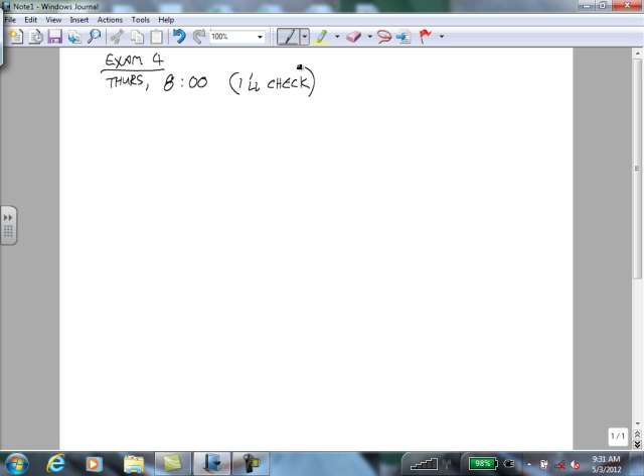This exam is going to have only one topic. The problems are going to be relatively simple because we won't have had much time to work on this stuff, but it's going to be on the energy method for solving linkages. We're going to finish talking about that today, and then the exam is going to be in a week.

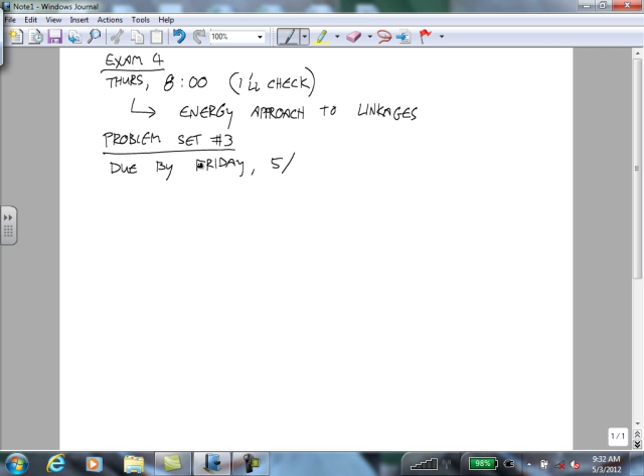There's also a third problem set that's posted right now, and that's due by Friday, 5/11 - is that the 11th? Friday is the, oh yeah, right.

And that has some linkage stuff and some rotating coordinate system stuff. We haven't done any problems that have combined those two topics, but other than that, there's nothing unusual about it, nothing tricky or anything.

Where do we turn it in? Oh yeah, so you can turn in a hard copy if you have it done by, say, Thursday, you can turn it in at the exam. Otherwise, there's a D2L Dropbox for it.

No, it's a linkage using the Newton's laws approach, and then you also have to do a rotating coordinate system kinematics thing with it. So it's bringing those two concepts together. There's no energy stuff on it.

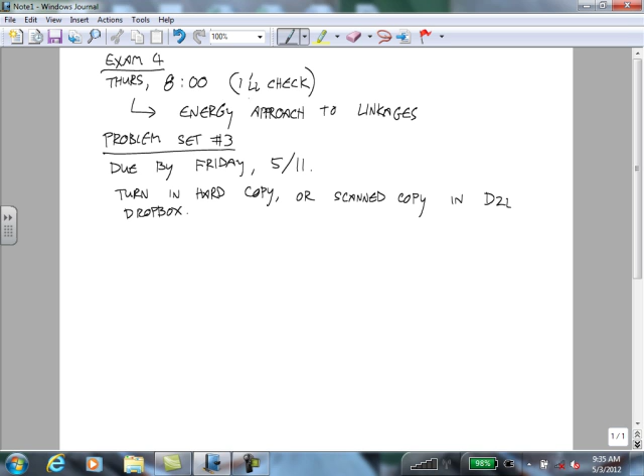No, right, that's right. By the way, this is my last - you guys are going to be the last time I ever give a test in a finals period that doesn't have a cumulative part on it, so.

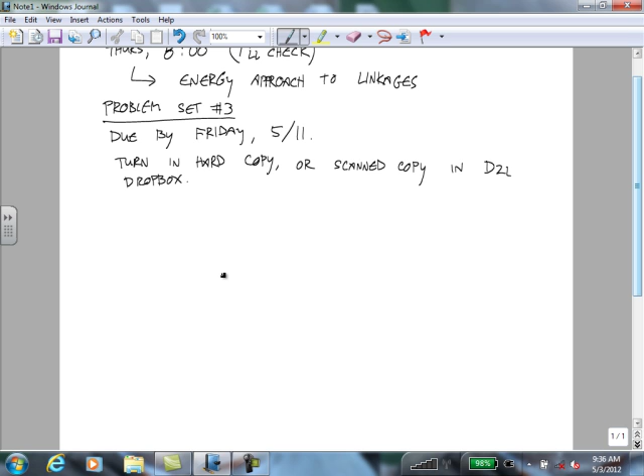That's right, it's all, yeah, so I think what I'm going to do in the future is have a portion that's cumulative and then a portion that's on... You know, I get 3 hours, why waste it?

All right, anyone have any questions about the stuff we're working on now?

Okay, so we're talking about an energy approach to linkages. Energy approaches are kind of cool because you can figure out all this information that has directions using an equation that has no direction associated with it. Seems odd, surprising kind of, but the fact that you don't have to do vector stuff is one of the strengths of energy methods.

Okay, and this energy approach uses the work energy principle, which says add up all the work on the linkage or the connection of things, and that gives you the change in total kinetic energy of the linkage. This actually is true for more than linkages, but it's most useful for linkages and sets of rigid bodies.

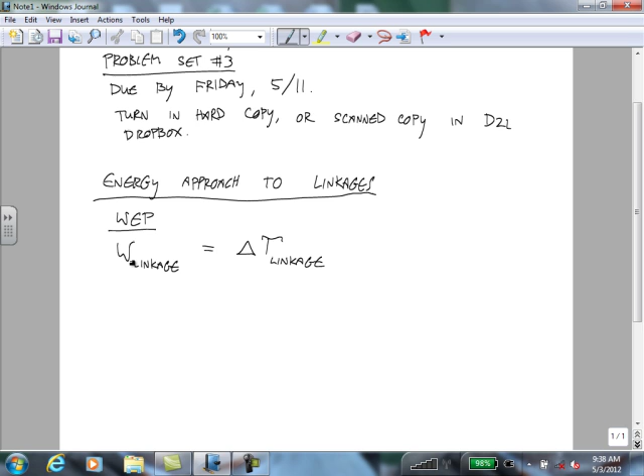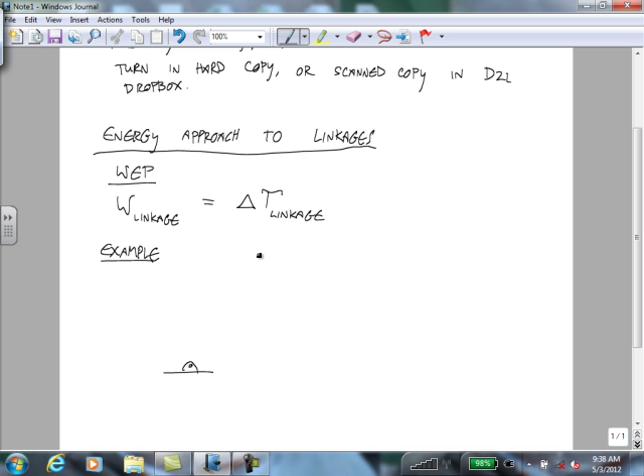So we're going to finish talking about kinetic energy. We're just doing one problem. We've talked about all you need to know for that. And then we'll go into how to calculate work. Once you have those two things, you know how to do these problems. The trick to these problems, though, is always coming up with the geometric constraints. So I'll mention some good places to look for, and some good places to start trying to find these geometric constraints.

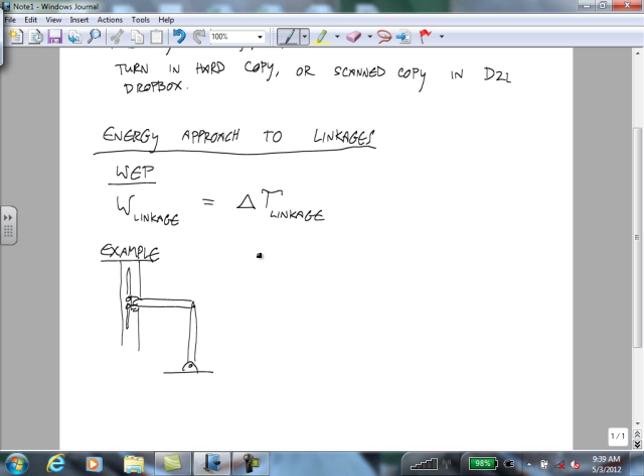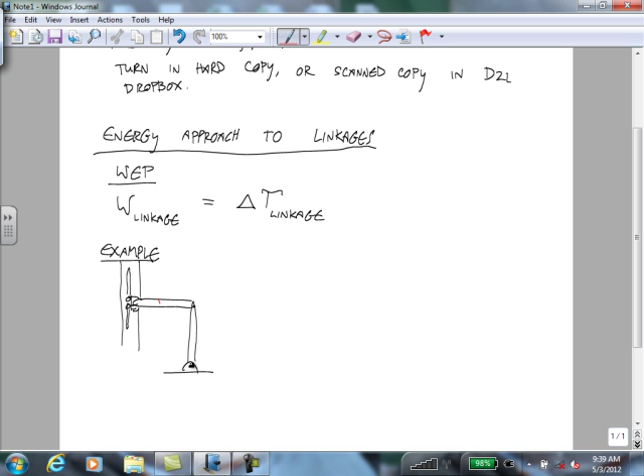Okay, so the example that I presented at the end of last time that we didn't solve was a linkage with a pin joint down here, and a pin joint connects it to a horizontal member. I did it as rollers on a wall, but really let's think of it as confined. You know, rollers on the wall could fall away from the wall. I want to make it clear that this thing is going to stay sliding along that vertical line.

Okay, and so we're going to call this member 1, this member 2. I'll call this joint A, B, and C. And we'll assume that the angular velocity, omega 1, is 5 radians per second. The mass of 1 and the mass of 2 are both the same, 10 kilograms.

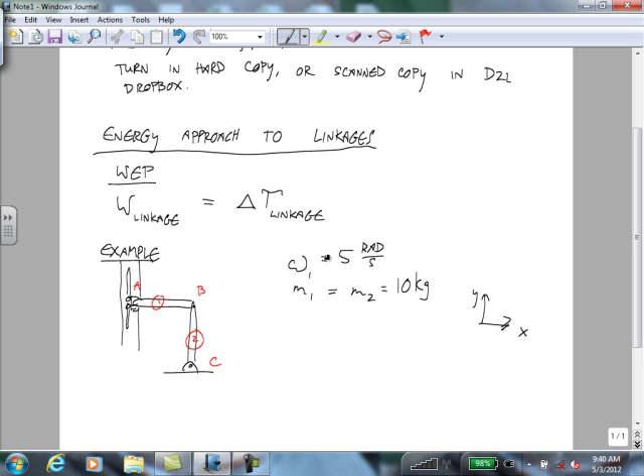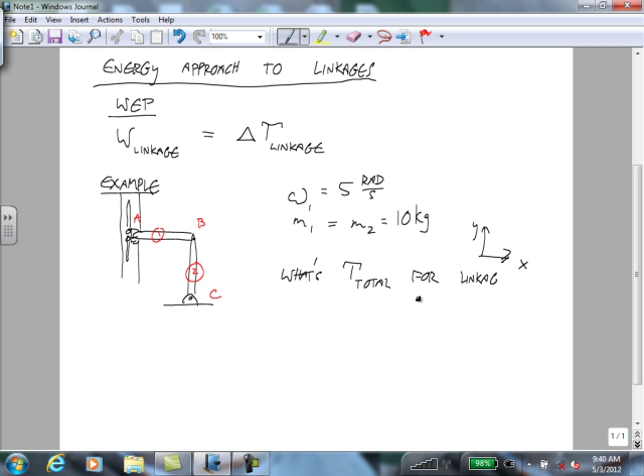And we're going to think about this. There's no coordinate system implied with energy methods, but in order to calculate the work and kinetic energies and stuff, you usually have to just choose a coordinate system, even though the numbers would come out exactly the same no matter what coordinate system you choose. So that's the one I'm going to use, standard coordinate system. And we want to know what's the total kinetic energy for the linkage.

So I'm going to first define the kinetic energy just using the rules that I said for kinetic energy, but I'm going to define as many variables as I need. I'm not going to worry about how many variables I have. Then afterwards, I'm going to think about going back and coming up with constraints between those variables. Okay, like for example...

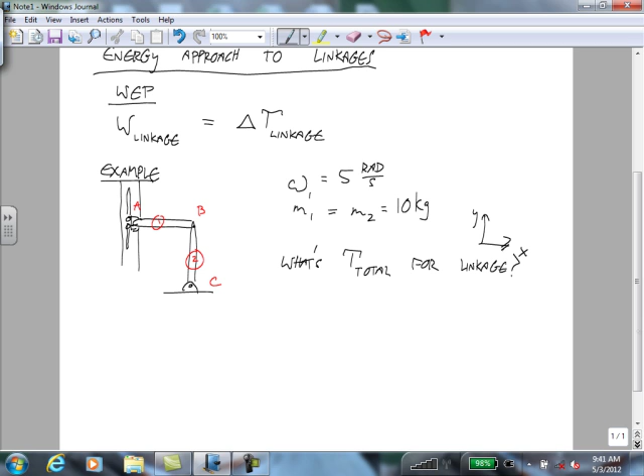The kinetic energy of member 1 here, that doesn't have a fixed point, so we have to use a translational kinetic energy plus a rotational kinetic energy. Obviously, the rotational and the translational kinetic energy are related in some way, right? But I'm not going to worry about that at first. I'm going to come back to that and deal with it with a constraint equation. So first, calculate the kinetic energy of body 1. There's no fixed point.

So the kinetic energy is equal to 1/2 times the moment of inertia about the center of mass times omega 1 squared, plus 1/2 times the mass of the object times the velocity at the center of mass squared. I guess both of these are centers of mass, just to be clear, I'll put the 1 on there.

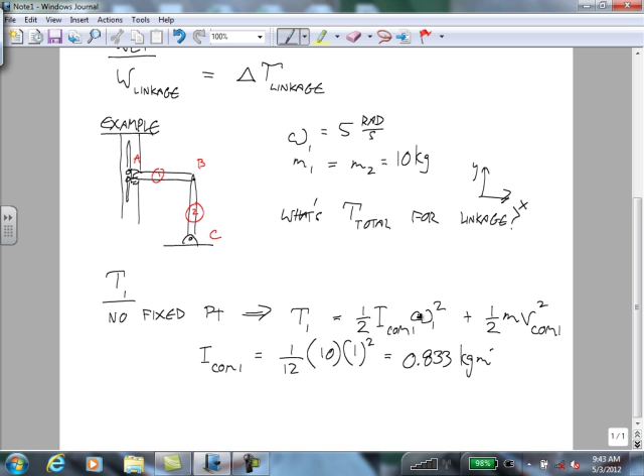Okay, and some of these things we can put numbers to, some we can't yet. The moment of inertia of 1 about the center of mass, we'll call this a slender rod, so this is 1/12 times the mass times the length squared. And so you get 0.833 kilogram meters squared. Both of these lengths are 1 meter.

Okay, so the kinetic energy of body 1 is 0.833 times 1/2 times omega 1, which we know is 5 radians per second, so times 5 squared. That's the rotational kinetic energy. The translational kinetic energy is 5 VCOM1 squared, and the mass is 10, so I already did that. So we have 10.4167. What are the units? So joules, right? This is work, so SI units are joules. So 5 VCOM1 squared.

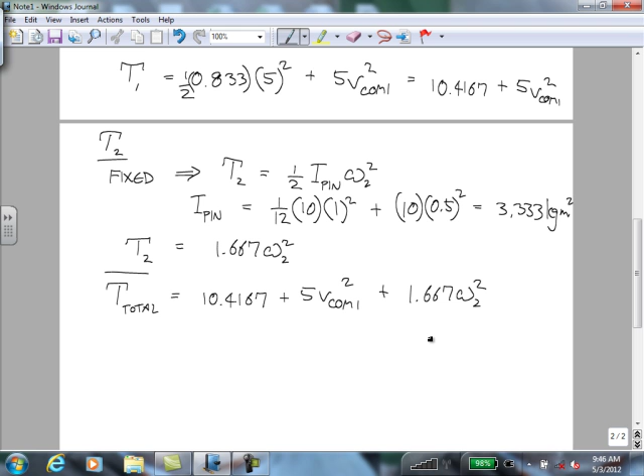So the total kinetic energy is equal to 10.4167. You're just adding up all the kinetic energies of the individual members, plus 5 VCOM1 squared, plus 1.667 omega 2 squared. Okay, but if you look at this object, any one angular velocity determines all the velocities and angular velocities.

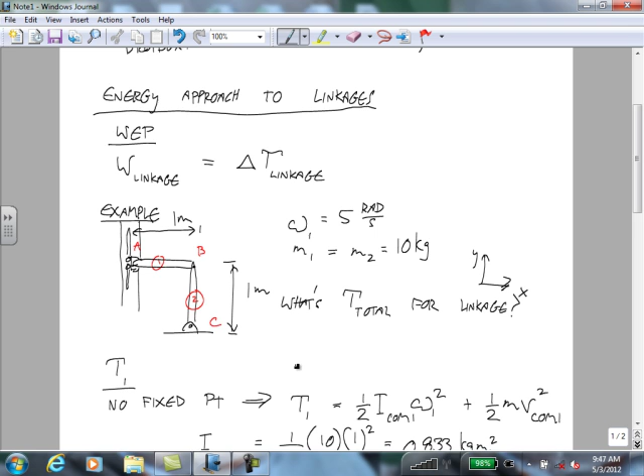Do you see that? If this thing, like if you move this thing, you move member 2, there's only one thing member 1 can do, and vice versa. Okay? This system is totally constrained, which means we shouldn't have to have any variables in our expression for kinetic energy.

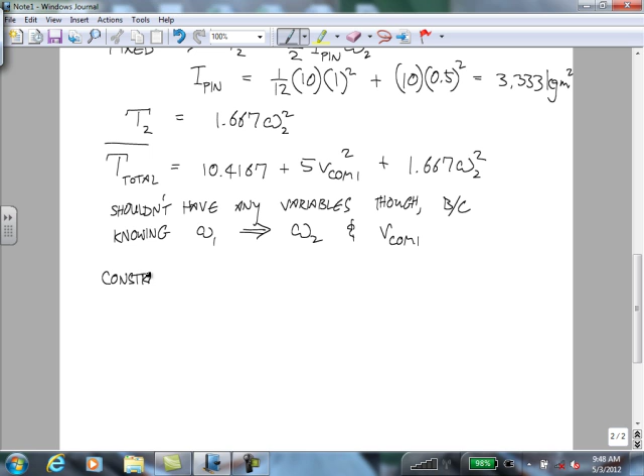So now we're going to look for those constraint equations. Okay, so let me write this. You shouldn't have any variables, though, because knowing omega 1 means that you should know omega 2 and VCOM 1.

So how are we going to do this? So for our constraints, we're going to do it the same way that we did it for the linkage problem set, and the same way we did constraints for any of those linkages. We're going to use the relative motion equations. And we're going to use them with, so actually, that position 1 is the position relative motion equation.

Let me write this in a more organized way. So the relative motion equations that we're going to use are going to be: the position of A is equal to the position of B plus the position of A relative to B. Okay? You can think of that as this is relative to the origin, this is relative to the origin. And the velocity relative motion equation says the velocity of some point A in our coordinate system is equal to the velocity of some point B relative to our coordinate system plus the velocity of A relative to B. Okay?

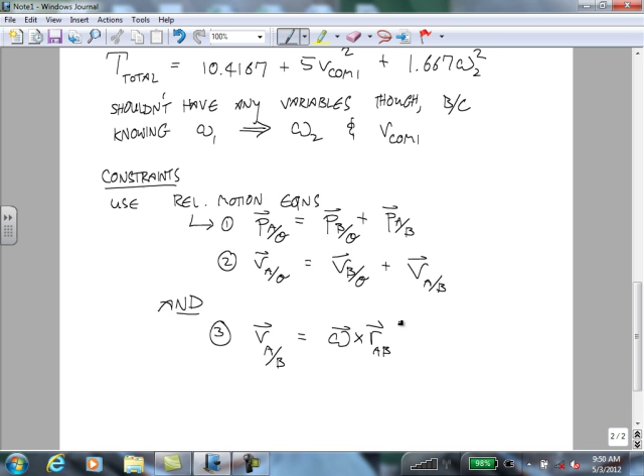And we're going to use that with the velocity of some point A relative to B, okay, is equal to omega of the body crossed with an r vector going to A from B, and that's all. Okay, so those are the same ones that we used for linkages with Newton's laws.

Okay, so what I'm going to do is I'm going to start at the pin. Yep. Yes, that's right. So you can start with either direction. I'm going to start with C because we know the velocity there is 0. Use that to calculate the velocity of B, and then use that and the known angular velocity of member 1 to calculate the velocity of the center of mass.

Yep. So those A's and B's you have are just like... Those are arbitrary, yeah. Oh, I see. I see why you asked that. Yeah, these... In this case, yeah. And what we want is the velocity of the center of mass of 1. So we're going to find the velocity of B relative to the origin, and then we're going to add it to the velocity of the center of mass of 1, given that we know the velocity of B.

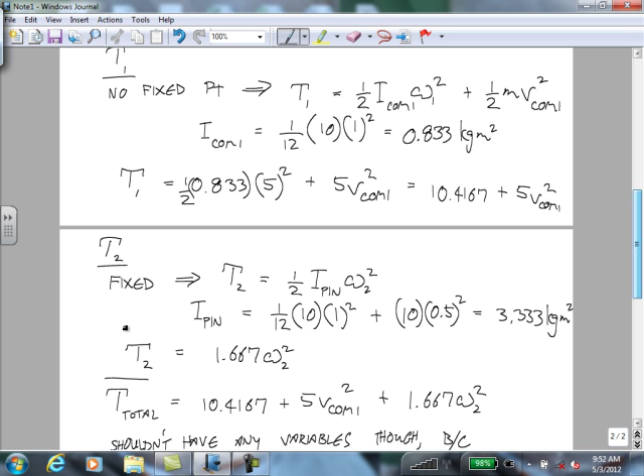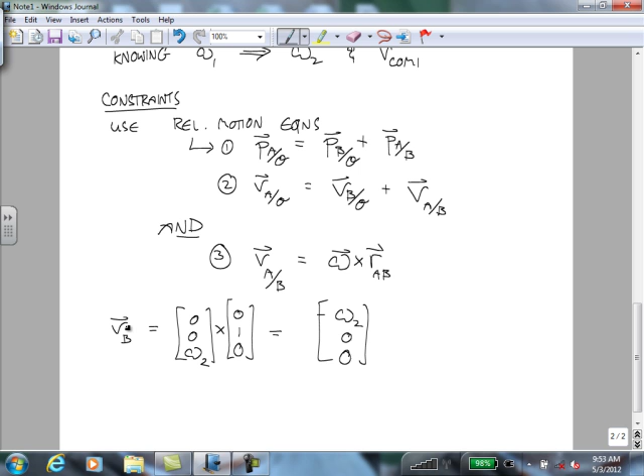Okay, so the velocity vector at B is equal to 0, 0, omega 2 crossed with an r vector going from C to B. So what's that vector? If we're going to B from C, what's the r vector? Yep. So calculate that, and, well, so this is negative omega 2, 0, 0. You can think of that as the velocity of B relative to the origin.

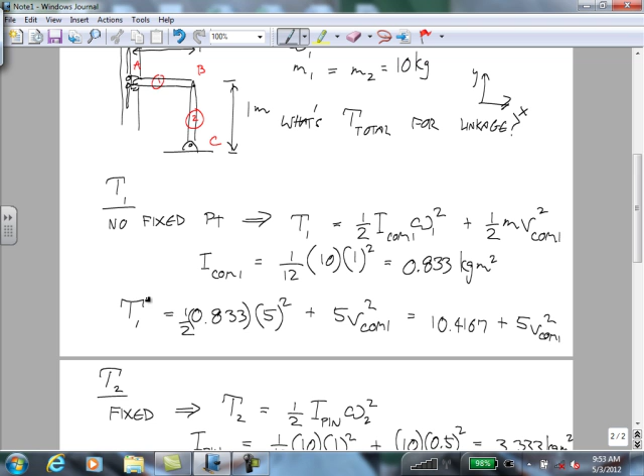And so now we want the velocity of the center of mass of 1 relative to B. Okay, that's going to be negative omega 2, 0, 0 plus 0, 0, omega 1 crossed with the r vector that points to the center of mass of 1 from B. So what would that vector be? Yeah, in the x direction, and then 0, 0. So combine all that, and you get negative omega 2, negative 5, 0. No, not 5. Negative. So this thing, this omega 1, is 0, 0, 5. And so if you do that calculation, you get negative 2.5, right?

So that's an expression for the velocity of the center of mass, but it doesn't give us a constraint equation yet, really. I mean, I guess it gives us, so now we could calculate the speed of the center of mass of 1 as this thing dotted with itself.

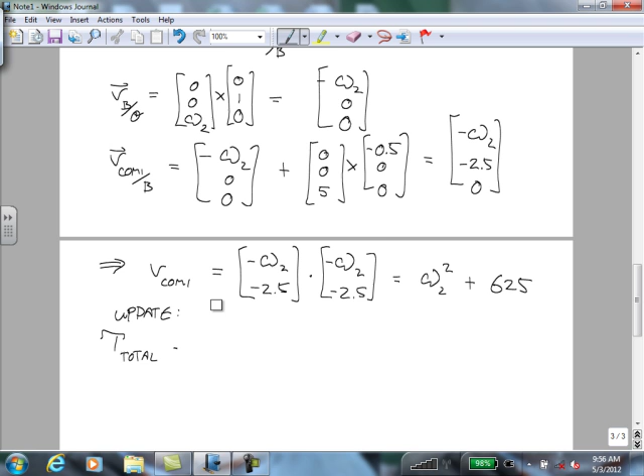So what we have now is one constraint equation. We have one of our variables in terms of the other two. But now we still have this expression for... like if you think of updating the total kinetic energy.

We would now have 10.4167 plus 5 times omega squared plus 625. Change this up here, by the way, sorry. When you take the dot product of those two, that gives you VCOM squared. You see what I mean? In this equation, I just wrote something down here that was wrong about dotting this. So 625, this whole thing I'm substituting in for VCOM1.

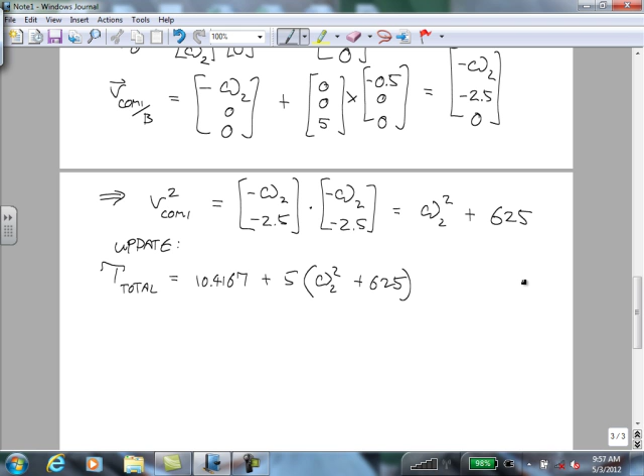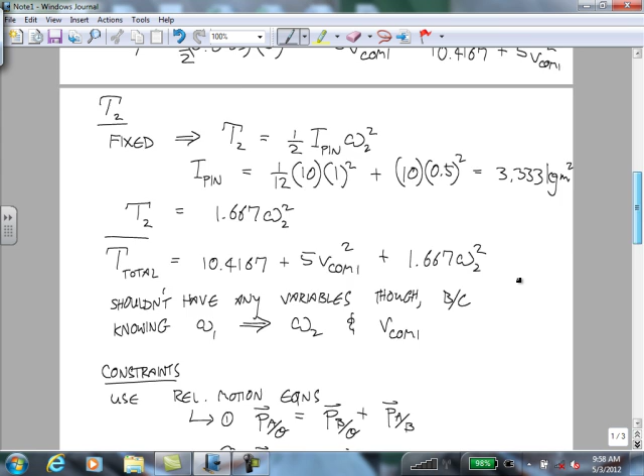Who's with me? Who's lost? Okay, you're trying to find the speed squared, okay? And the length of a vector is the square root of the dot product of the vector with itself. So the speed, the magnitude squared is just the dot product with itself. So if you have something in vector form, this is just a way to get the magnitude squared.

And then finally, we have, where is it? This, 1.667 omega 2 squared. Okay, so we're a step closer. Now we only have one variable instead of two, but we need one more constraint equation. So where's that constraint equation going to come from?

Well, actually, we can use it again from velocities. We're just going to come up with an expression for the velocity of the rollers at A. And then we know that those rollers aren't allowed to have any x velocity, because they're confined to just move in that vertical direction. So our constraint 2 says the velocity at A, the velocity vector at A, is equal to the velocity vector at B

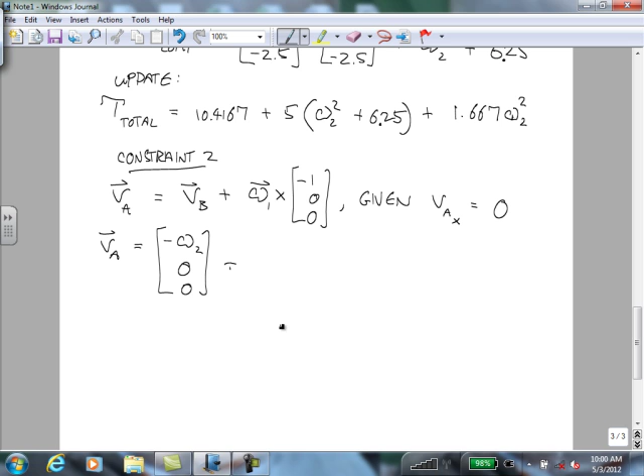Okay, any questions about this relationship? And then what I'm going to do is use the fact that the VA x component has to be equal to 0. So VA vector is our VB from before, negative omega 2, zeros, plus 0, 0, 5, because we know omega 1 crossed with negative 1, 0, 0. And if you calculate that, you get negative omega 2, negative 5, 0.

Our criterion that says the x component of VA is equal to 0 now tells us that negative omega 2 is equal to 0.

Okay, so first, any questions about the math, where the constraint equation came from? Now we have to think, or we don't have to, but it's always a good idea to think, does that make sense? We have one of those two members with an angular velocity and the other one without an angular velocity. Does it make sense in this case?

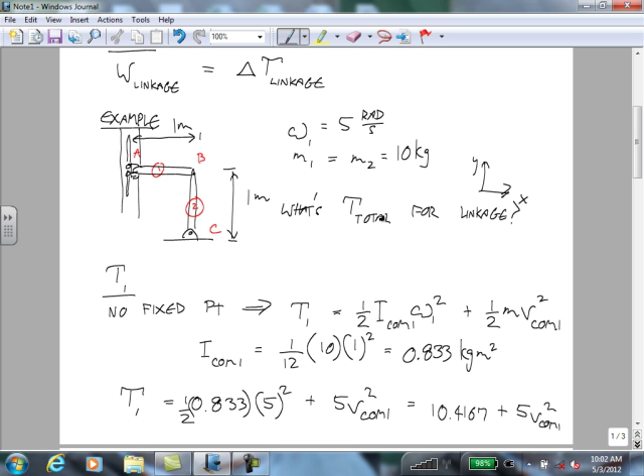Yeah, it does. Instantaneously, if this is moving up and down, that motion is instantaneously independent of this thing. Like this, for this to move instantaneously up and down, that's tangent to a circle around B. So just at this instant, if I would have drawn it in any other position, we'd get some angular velocity for omega 2, and that it wouldn't make anything any harder. We just get a different value. But in this case, we got 0.

So now we plug 0 in for all those omega 2s. It's only because your R vector is negative 1 without a y component, right? It would have a y component. If it had a y component, then... That's right. That's right. Exactly.

So plug this fact now into here, update, and you get that the total kinetic energy is equal to 10.4167 plus 5 times 6.25, and you get 41.667 joules.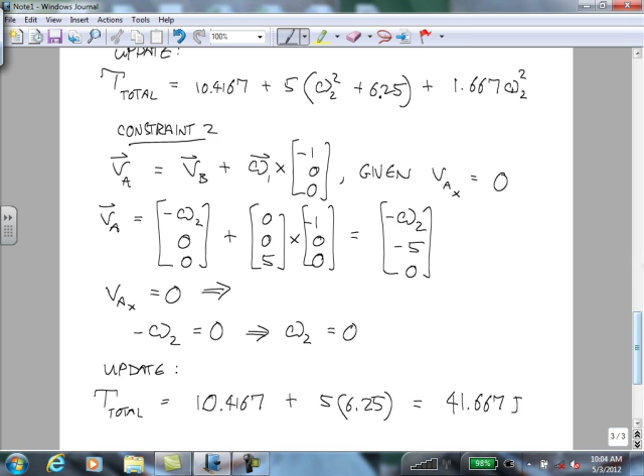Okay, you're going to have to do, on all these problems, some of that stuff. And in some cases, you can save yourself some work by sort of thinking about it. You can figure out some of these relationships due to symmetry and whatever. But I would recommend, don't get too cute about it. You won't ever have big time constraints on this test. And if you ever have to do real problems with this stuff, you won't have any time constraints, like you can stay up another hour or whatever and do it right. So I would recommend getting used to doing it with this vector approach, with this relative motion approach.

Okay, so now we have to talk about how to calculate work.

It's the only thing left to calculate because the work energy principle just equates work with kinetic energy. If you go back to last class, I said that calculating the kinetic energy was going to be our topic 1. So this is our topic 2.

And we can break this up into work produced by a force. The definition is the integral from location 1 to location 2 of the force vector dotted with the incremental change in position. You might remember this is called the line integral.

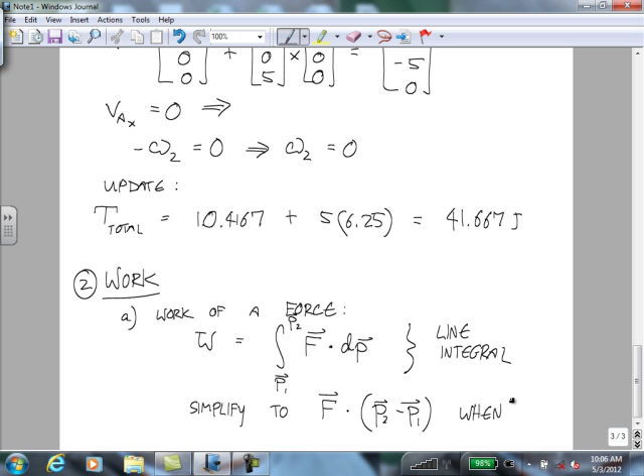In most cases, we won't have to do this integral. In fact, in this class, you won't ever have to do any of these integrals, but that's the definition. When would you have to use an integral, and when could you just calculate it algebraically? So you can simplify this to F dot p2 minus p1 when... finish this sentence, it's like a nerdy Mad Lib.

That's actually, no, not necessarily. So actually, it can be a curve in some cases, and you can still calculate it this way. And it can be a straight line, and you can't calculate it this way. What it has to do with is the nature of the force.

And yeah, if it's a constant force, that's right. When it's a constant force, the path doesn't matter. So in a gravitational field, which we always approximate as a constant force, right? The amount of work done to do a motion like this and end up here is the same as the amount of work to do this.

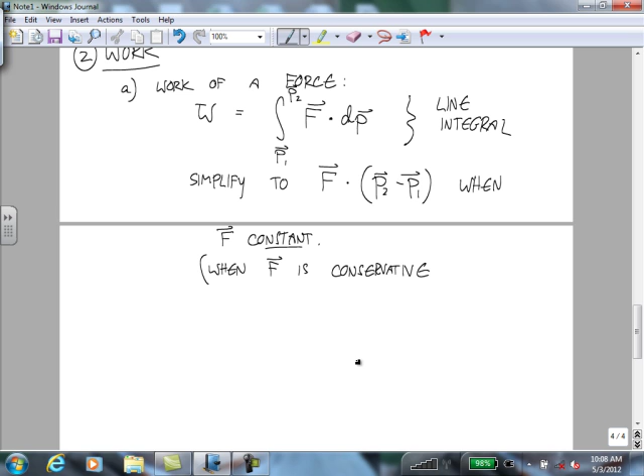This is sort of an aside, we're not going to do ones like this, but when the force is conservative, you can always calculate the work as the change in potential energy. By the way, that's a good thing to keep in mind. Why can't you do that when the force isn't conservative? That's kind of a nonsensical question because there's no such thing as potential energy except in conservative force fields.

Okay, so you're out of luck. You got to do the integral if you're dealing with friction. Springs are conservative forces the way we usually treat them, unless you're dealing with friction and stuff like that. The two most classic conservative forces that you do in physics classes have to do with springs and gravitational fields. Okay, that's enough about that.

But in this class, for these problems, you're just going to use this one. So I'll put it in red. I don't want to say this one's more important than the others because you have to think about the cases, but practically speaking, for the problems you're going to be doing, this is the only one you have to think about.

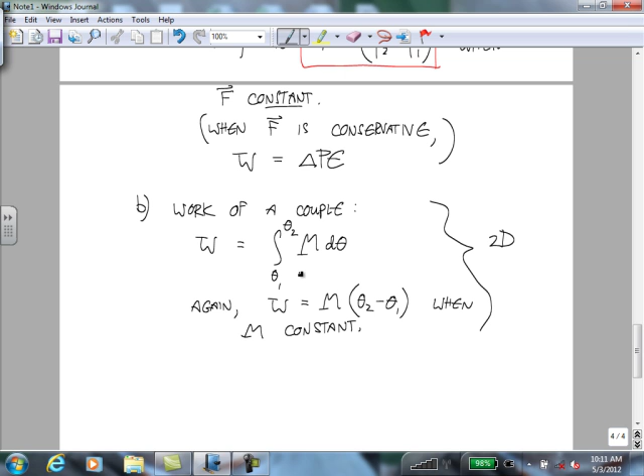And the second work calculation that we're going to have to do is the work of a couple. And that is the integral from some angular position theta 1 to theta 2 of the couple d theta. And again, you can calculate the work as the moment times theta 2 minus theta 1 when the couple is constant.

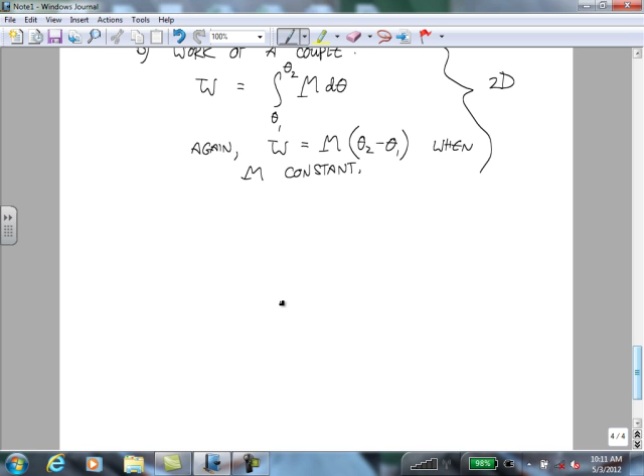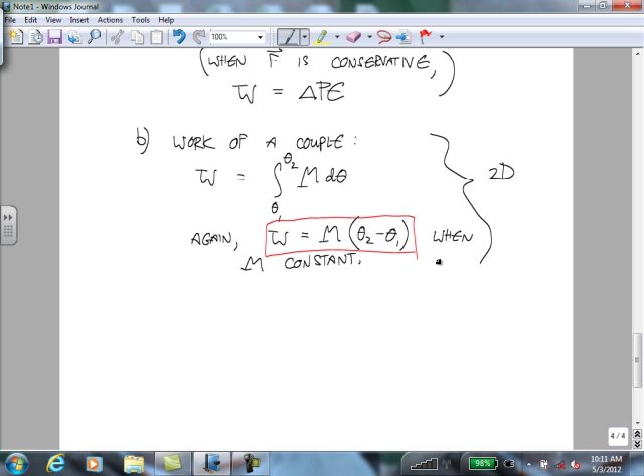This is 2D. Things get a little messy in 3D, but we're only going to do 2D problems this way. Any questions about either of those? There could be analogs to the one we just talked about, but there aren't too many practical examples of couple fields, conservative couple fields and stuff. There's just nothing around us that does that. So pretty much this is the one you're going to deal with.

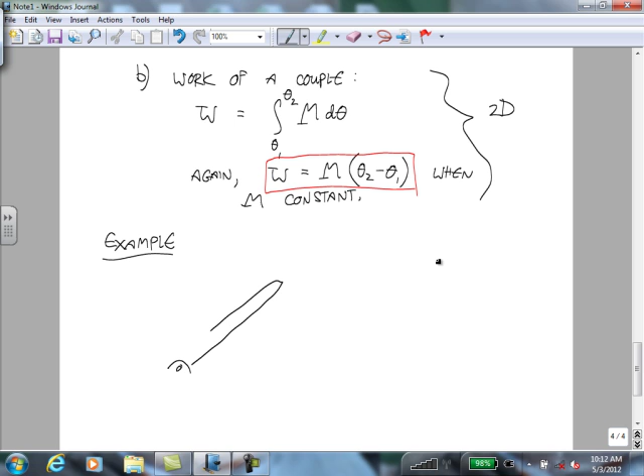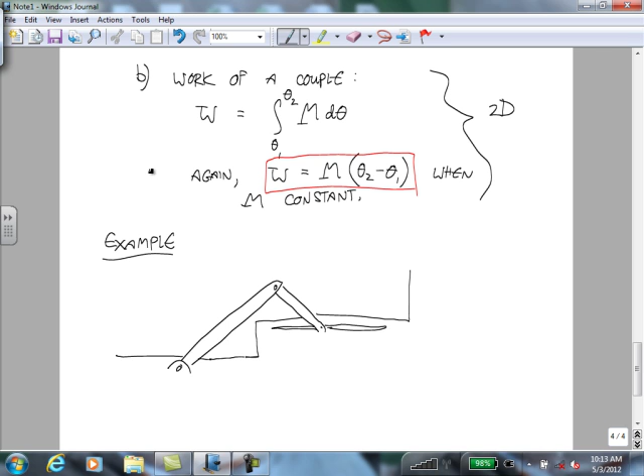Okay, so here's an example. Let's say we have a member like that, a member that's half as long, like that, that's connected to a slot. You following what I'm saying here?

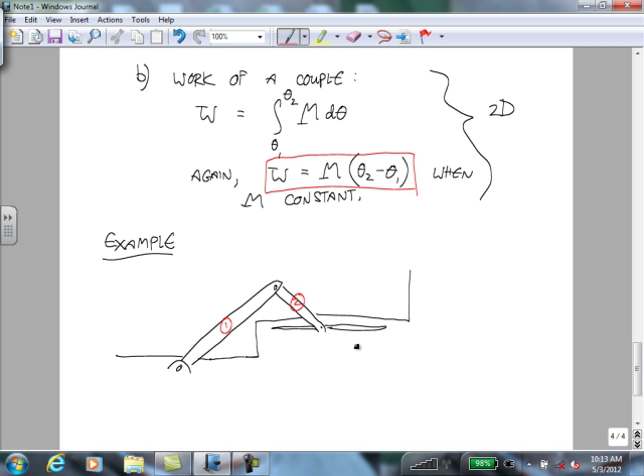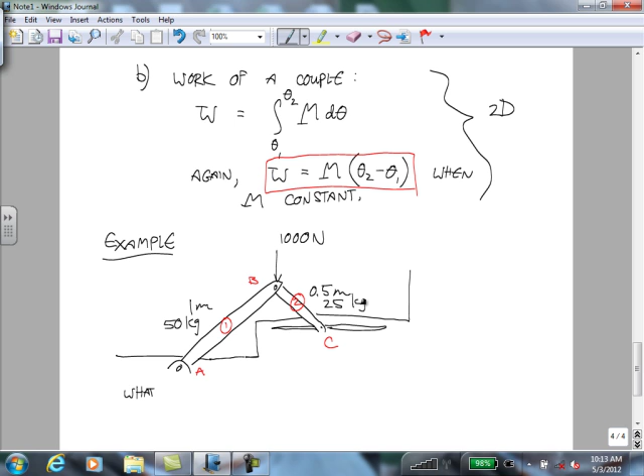Okay, so if this arm moves, the right arm slides along that slot. If we call this member 1 and this member 2, and we'll call this A, B, I gotta move B because I'm gonna put a force there, B and C. This has a length of 1 meter. This has a length of half a meter. We have an external force acting down of 1,000 newtons. And this member 1 has a mass of 50 kilograms, member 2 has a mass of 25 kilograms. We're going to include gravity.

And the question is, what's the total work done on the linkage as H, and let's actually make H go all the way to the pin down here, up to the top pin. Okay, so as H goes from a height of 0.5 meters to 0.25 meters.

Okay, so can you picture what the orientation of these members is going to be? So at these 2 points, when H is equal to 0.5 meters, what are those angles going to be?

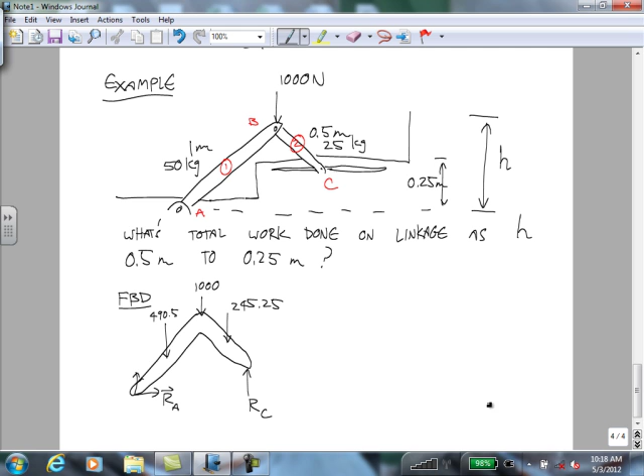Yep, just a force perpendicular to the slot. Yeah, calling that RB would not be a good idea.

Okay, so let's set up some extra variables for now, and then we'll go back and do the constraint equation. So let's call this the height of the center of mass of 1. Let's call this one the height of the center of mass of 2. This one we're already calling H.

And of these forces in the free body diagram, which ones produce work? Does the force at the pin do any work? No, because that point doesn't move. Okay. Does the gravitational force here do work? Yeah. Does the 1,000 Newton? Yep. 245? Yep.

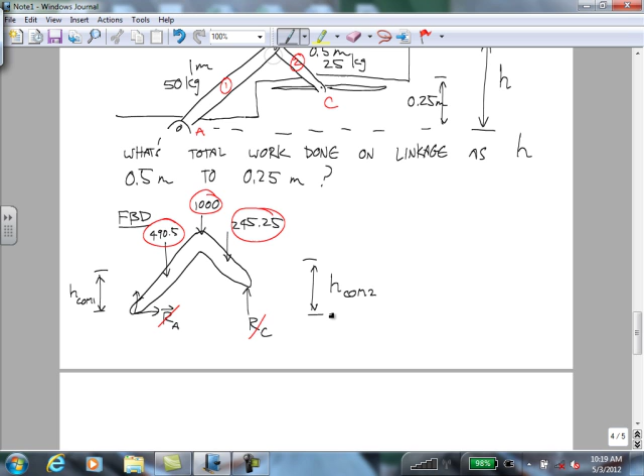RC? No, because the motion is perpendicular to the force. And that's even true if it's just instantaneously perpendicular, although in this case, that motion, no matter where it goes, is perpendicular to the force everywhere. But that would even be true, if this was at the bottom of a circular slot.

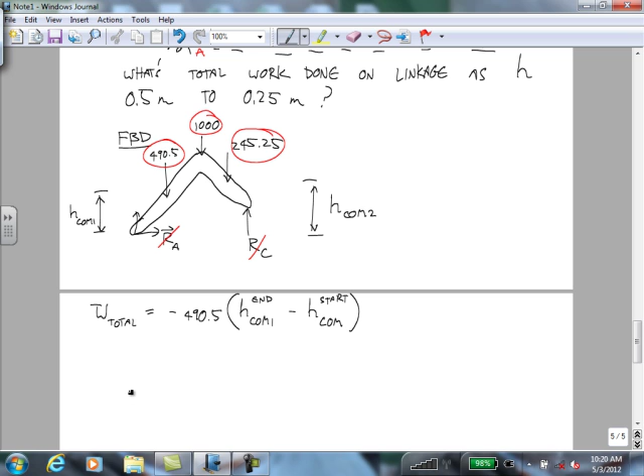So we can set this up as the total work is equal to negative 490.5 times H COM1, let's say at the end, at the second position, minus H COM1 at the start, plus a downward force of 1,000. I'm just doing these as, you can also do these as a dot product, but this is what you would get from those dot products. Let me know if that's confusing, but times H at the end minus H at the start.

And then plus negative 245.25 times the height of the center of mass of 2 at the end minus the height of the center of mass of 2 at the start.

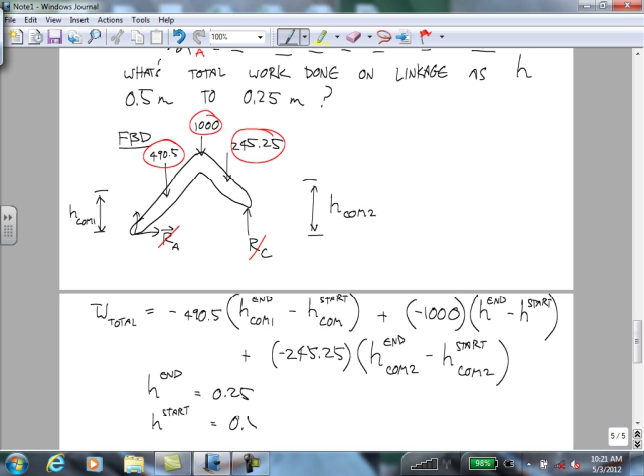Okay, so the two that we know without thinking about any kind of constraints are H end and H start. Those are the ones that are given, right? H end is 0.25. H start is equal to 0.5.

So you can update this as the total work is equal to negative 490.5 times H COM1 end minus H COM1 start, minus 245.25 times H COM2 end minus H COM2 start. And then this one gives you negative 1,000 times 0.25 minus 0.5. So that's just going to be adding 250.

Does it make sense that that work should be positive, if you think about it physically? Do you have a feel for that? Remember what work means? If the direction of the displacement vector and the direction of the force are in the same direction, then you have positive work. That's what's happening here - the thing is moving down, the force is down, so it's positive. It's adding energy to the system.

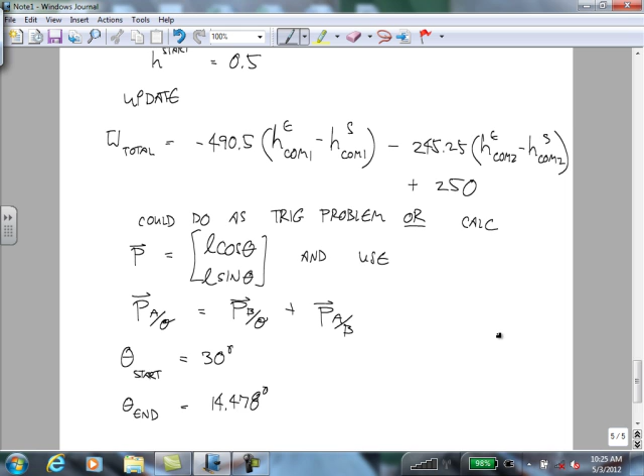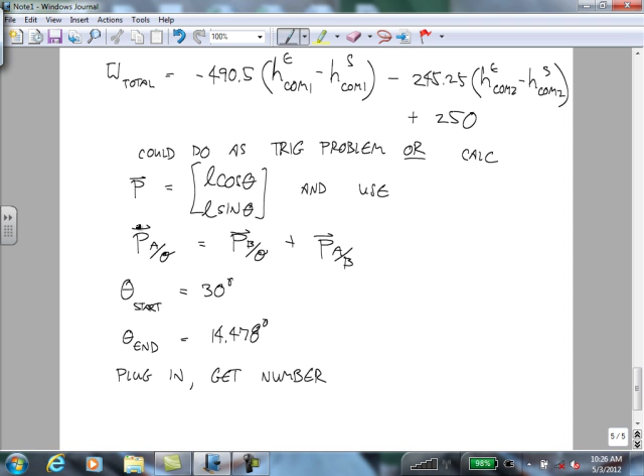Okay, let me just give you that. If you're going to do it this way, the theta at the starting point is 30 degrees. The theta at the ending point is 14.478 degrees. And if you plug this in with the trigonometry, the relative motion equations - for which one? That can be the approach for both of them. Oh, I see what you mean - the angle, no, the angles are different. Yeah, thank you, that is for number one. So that's the theta, yep.

Okay, so we're just looking at a free body diagram of the whole thing, right? And if you do a free body diagram of the whole structure, then you're not worried about internal loads. But then the real question is, why are we allowed to do this, given that the works of those internal loads don't necessarily come out to be zero? That's what we talked about last time. It turns out that what happens to pieces inside rigid bodies and at pins of rigid bodies is that those internal forces do zero work because the objects move together. You might want to glance back at your notes from last time, because that's a good thing to store with this information. So yeah, the free body diagram doesn't show the internal loads because it's a free body diagram of the whole thing, and those are internal. But the important thing is, the reason I chose a free body diagram of the whole thing is because of the types of forces that do zero work.

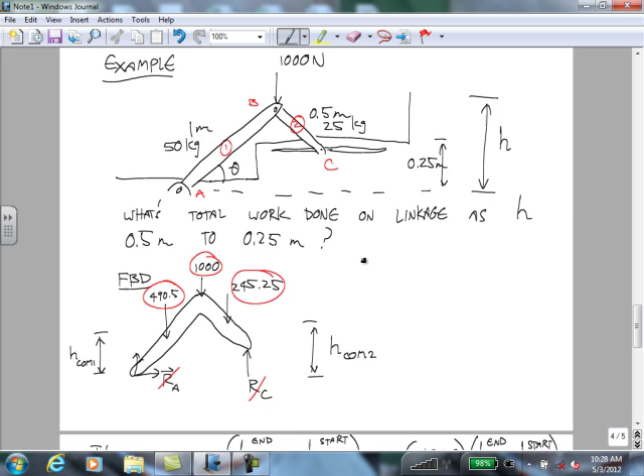RC doesn't work because all the weights are perpendicular to the motion. It's actually, it doesn't have anything to do with what kind of loading we have. No matter what kind of loading we have, even if I put a force going this way, the work is calculated by the force times the displacement at the location where the force is applied. So if I put a force going horizontally at the center of this member, we'd have to have a work term that dealt with the horizontal displacement of this point. But at this pin, this type of joint can only support upward forces. So its instantaneous displacement is always horizontal, but its instantaneous force is always vertical. So no work is done here, no matter what other forces are happening somewhere else.

Okay, so that's an important thing about work. I gave you this, and maybe I could have made that more clear when I defined work. So what we're talking about here is the force at a point and the displacement of that point. This is the motion of that point. It's probably worth writing in here. Yeah, and it's a dot product - so if you do it as vectors, it'll come out telling you that. But yeah, it's a projection.

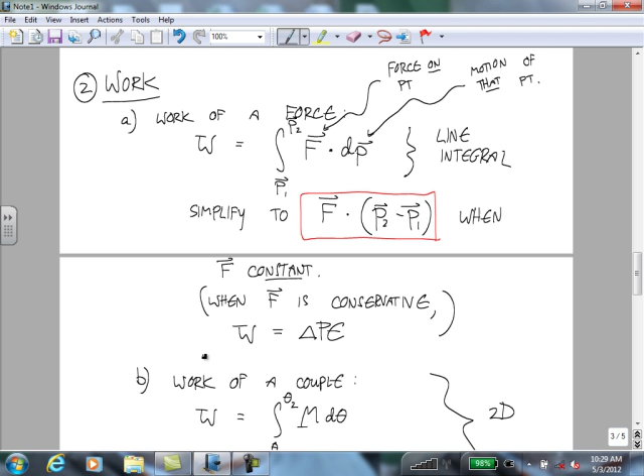Yeah, you have another question? Okay. Yep. Any other questions? Okay, so let me.

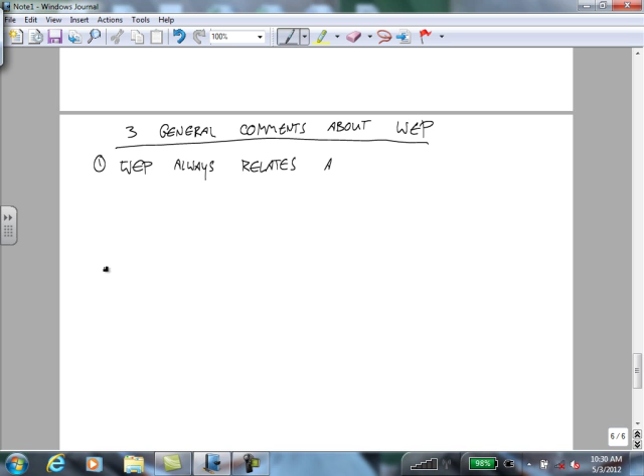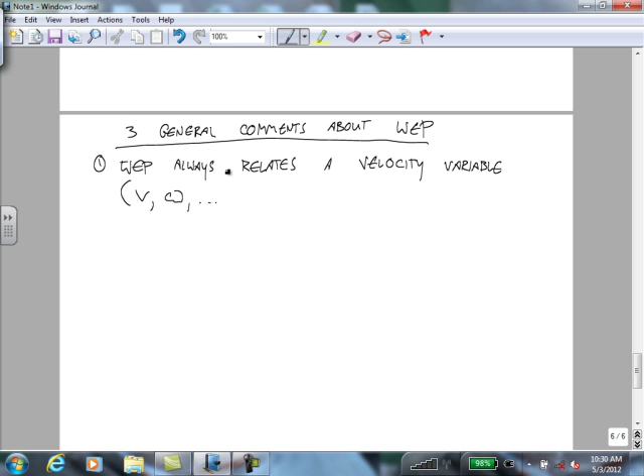Give three general comments about using the work-energy principle and this energy approach. About the work-energy principle: the first is that using the work-energy principle always relates a velocity variable, like a speed or an angular velocity, or some combination of these things, to a position variable - which would be like some kind of distance or an angle. That's different from what you get from Newton's laws.

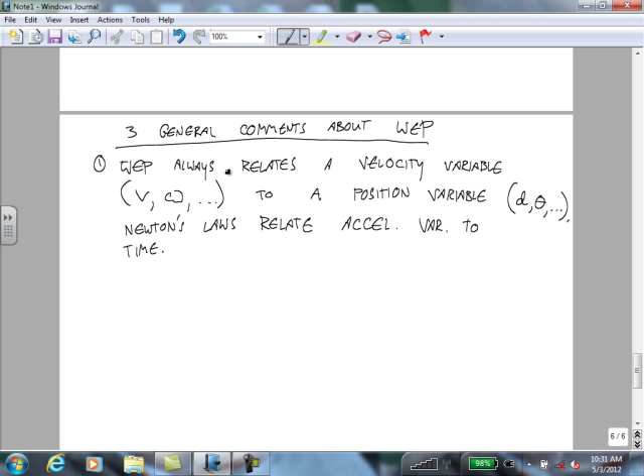Newton's laws always relate an acceleration variable to time, because you find something at an instant and then you integrate through the instance to calculate the total motion. So that's a fundamental difference, and that's why...

You probably just sort of do this naturally, but if you were taking some physics standardized test and you had a problem where a skier at the top of a hill, and they asked you how fast he was going at the bottom, you've probably seen enough of these problems that you're like, oh yeah, that's a classic example of conservation of energy, the work energy principle. So you know to use that.

But why is that the most efficient way? I think the best answer is this problem is asking you to relate a speed variable, a velocity variable, how fast he's going, with a position variable, where he is at the bottom. Even if you were given the shape of the hill, or if it was flat, you could calculate an acceleration at every instant, but then you'd have to integrate to get that velocity. So those are the kind of things to look at when thinking how to approach a problem. Two different linkage problems - when is it better to use this one or this one? It has to do with how you want your information organized. Any questions about that?

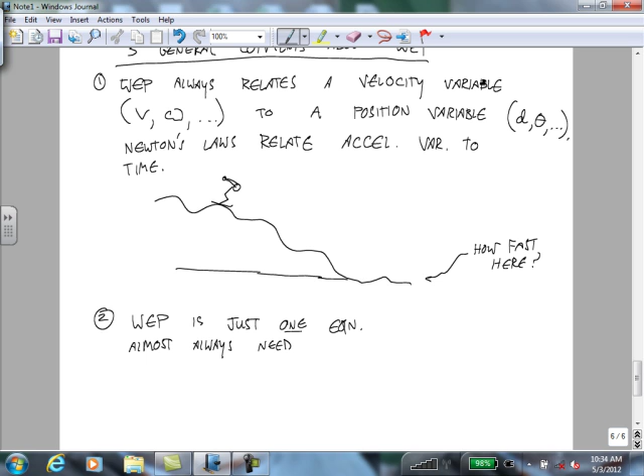Second, the work energy principle is only one equation. You almost always are going to need constraint equations to reduce the number of variables. I'll call them geometric constraints. And finding those is almost always the trickiest part of these kind of problems.

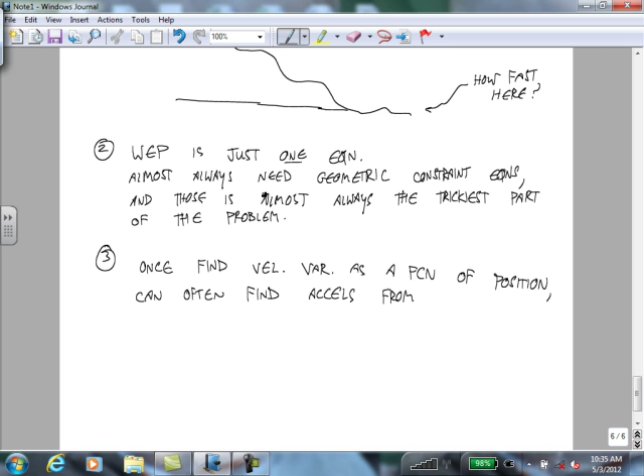And then a third thing - these are the two most important, but it's worth pointing out that if you want to find an acceleration, often you can. So once you find your velocity variable as a function of a position variable, you can often find accelerations, if that's what you want, using the chain rule, that same approach we used when we first talked about particle kinematics.

As an example, if you know a velocity vector as a function of x, then the acceleration vector is the derivative of the velocity with respect to x, times dx/dt. You can set it up like that. So that's something to consider in some cases if you need to calculate an acceleration and everything else in the problem is pointing you towards an energy approach.

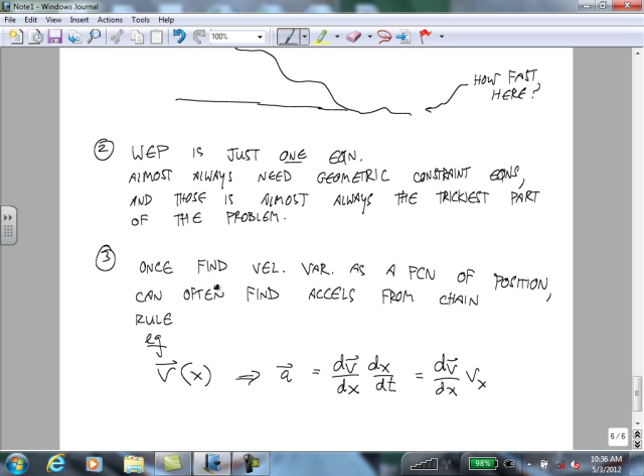You could also do it analogously. If you know an angular velocity as a function of an angle, then the angular acceleration is d omega/d theta times d theta/dt, and that is d omega/d theta times omega. Any questions about that?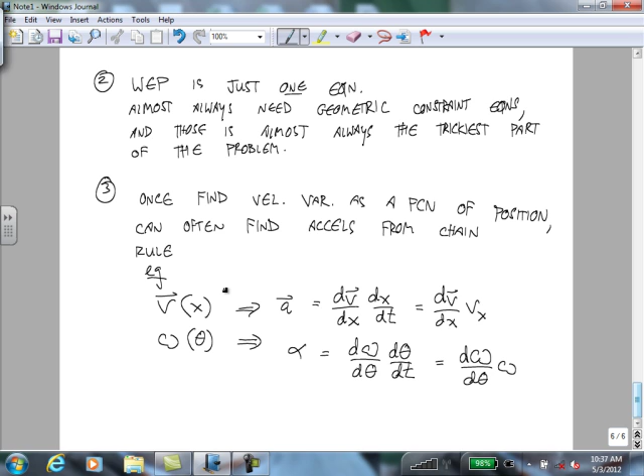Okay, let's try to get through a quick problem. Say that you have this linkage. Each member is 1 meter, 10 kilograms.

What? Oh, yeah. Thank you. Yeah, that's a pretty uninteresting dynamics problem, the way I drew it. That's a roller. Let's go A, B, C, 1, 2.

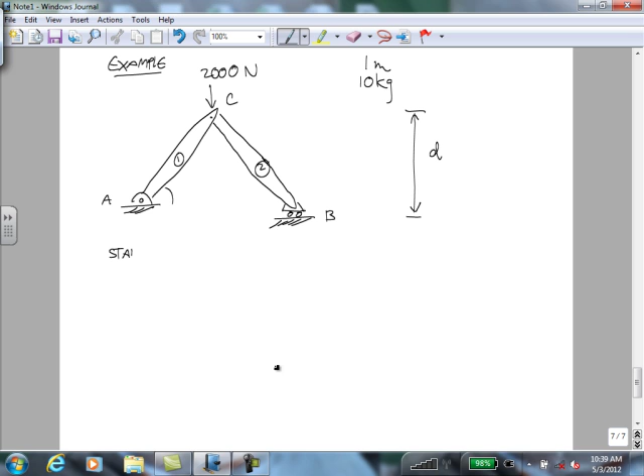And let's say that there's a downward force of 2,000 newtons. And we want to know if this started at a height - let's call this D. So the start height is with D equal to 0.866, like this is at 60 degrees. What's the speed at the roller B as a function of D?

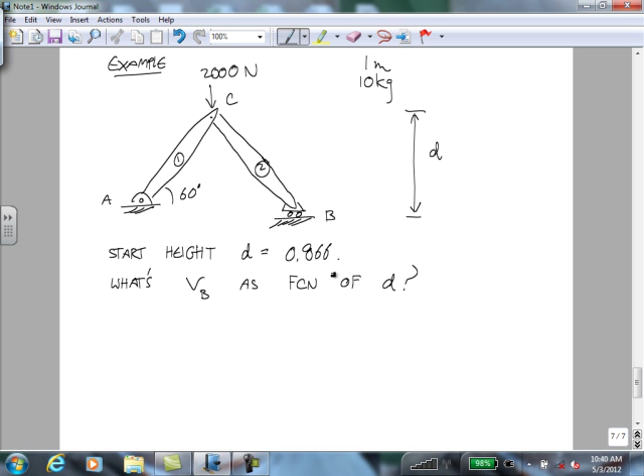So this is the form that, ideally, you should look at and say, okay, it's a linkage, it's calculating a velocity as a function of a position. All those signs point to using an energy method for this problem.

Okay, so the total work - well, let's draw a free body diagram. So there's a downward force of 2,000 newtons. There's a force here, FA. This one's a roller, so we know the direction of that force, FB. And then there is 98.1 newtons down there, 98.1 newtons down there. Let's call this point D and this point E.

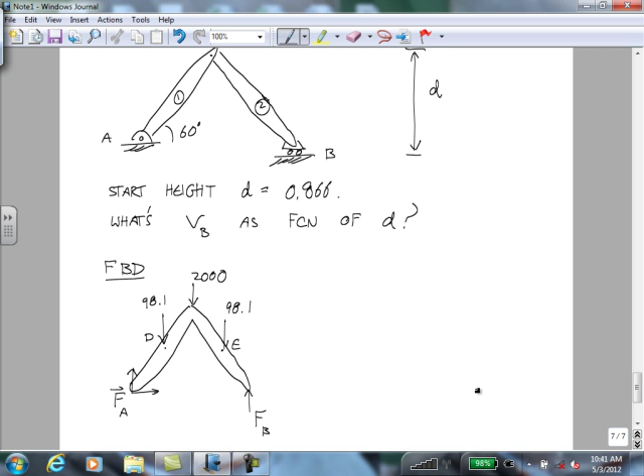So first, let's calculate the work. Okay, so first, this one isn't going to do any work. This one isn't going to do any work. This one, and this one, those all are, right?

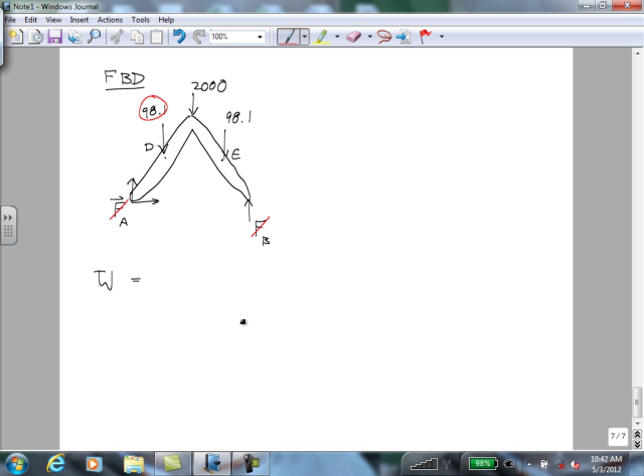With this kind of thing, the way of drawing it suggests that it's going to move smoothly. If a problem is drawn like this, that means you're not thinking about stuff like that. There'd have to be more information given to tell you that's a concern of yours.

So the work is equal to negative 98.1 times the height of D at the end minus the height of D at the start, minus 2,000 times D at the end, which is just our variable D, minus the start height, which was 0.866, and then minus 98.1 times H E end minus H E start.

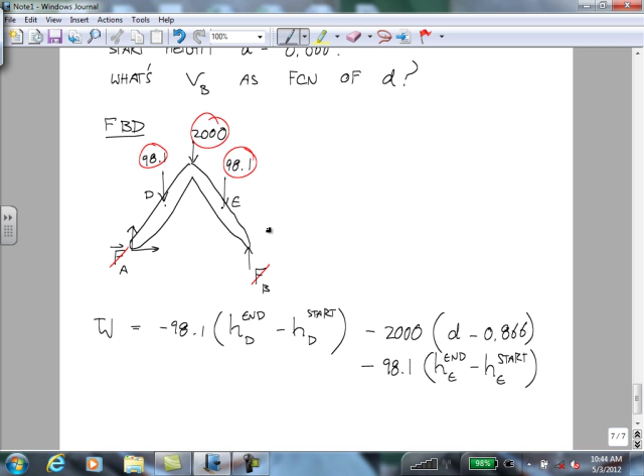Okay, so what about the constraint equations? Well, the geometry is pretty simple in this case. This is an isosceles triangle, so this angle is always going to be equal to this angle. We're going to use that later. This height is always going to be half of this height, and these two heights are always going to be the same.

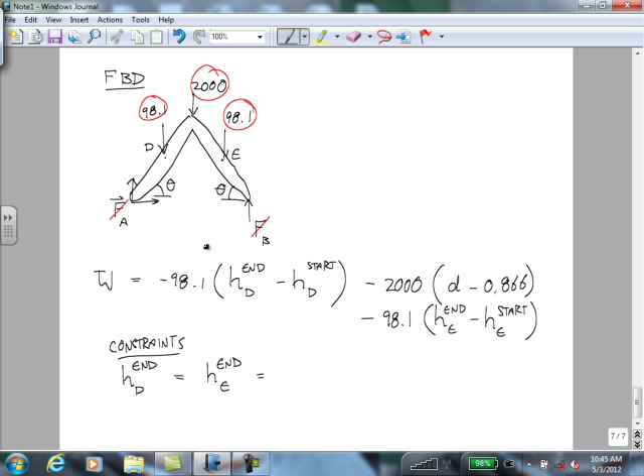So our constraints for the work say that HD end is equal to HE end, which is equal to D over 2. And HD start is equal to HE start is equal to half of 0.866, so 0.433.

So the work is equal to negative 98.1 times D over 2 minus 0.433, minus 2,000 times D minus 0.866, minus 98.1 times D over 2 minus 0.433.

So you can rewrite that as negative 98.1 times D minus 0.866, and then minus 2000 times D minus 0.866.

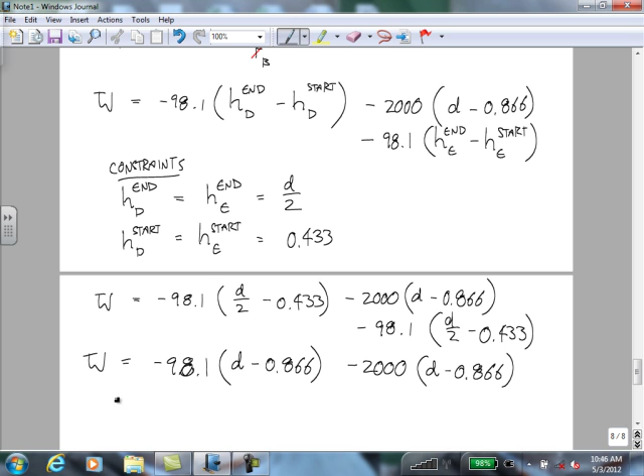And now the kinetic energy. First, let's do the kinetic energy of body 1. Does it have a fixed point? Yeah, so that's going to be 1/2 times the moment of inertia about A times angular velocity of 1 squared. So that's 1/2 times 3.33 times omega 1 squared.

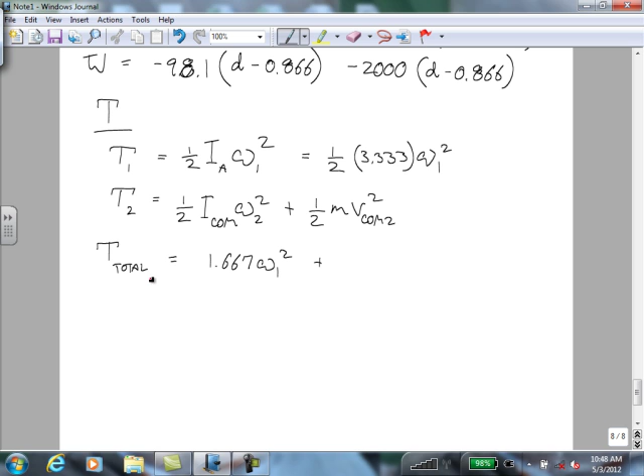Kinetic energy of 2 is equal to 1/2 of the moment of inertia about the center of mass times omega 2 squared, plus 1/2 times the mass times the velocity of the center of mass 2 squared. So the total kinetic energy is equal to 1.667 omega 1 squared plus 0.4167 omega 2 squared plus 5v COM2 squared.

And now let's think about the constraints. So this is an isosceles triangle. These two angles have to be the same, which means if this one has an angular velocity of 6, what does this one have to be? Negative 6, actually, but yeah, same magnitude. So omega 1 is equal to negative omega 2.

Also, the velocity of the center of mass of 2 has to be equal to 1 times the cosine of theta, sine of theta, plus 1/2 times the cosine of theta, negative 1/2 times the sine of theta. That's the position.

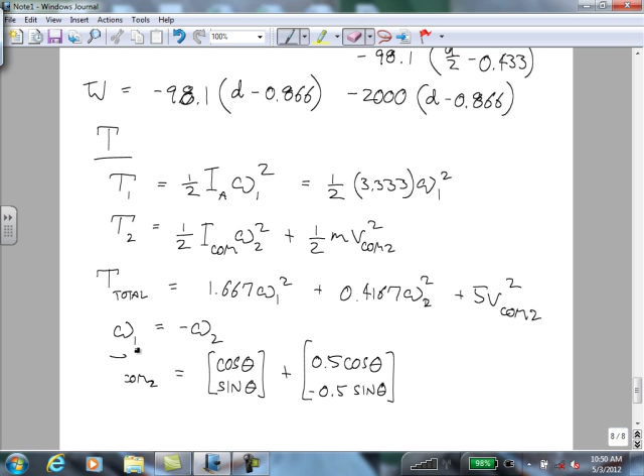So the velocity, you can take the derivative. This might have been a little bit faster to do using the velocity relative motion equations, but this is the way I thought to do it. So just take the derivatives. And so you get omega 1 times cosine theta — no, this is negative omega 1 times the sine of theta, positive omega 1 times the cosine of theta.

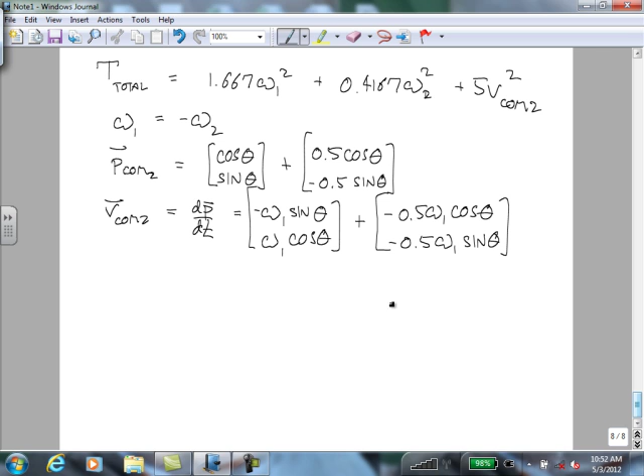Plus negative 0.5 omega 1 times the cosine of theta, negative 0.5 omega 1 times the sine of theta. And so you get negative 1.5 omega 1 sine theta, positive 0.5 omega 1 cosine of theta.

Sorry, I know I'm going over, but I'm almost done with this. And then now that we have this stuff expressed in terms of theta, let's relate d to theta. So d is equal to 0.866 minus sine of theta. As you're going through this, you should just look at the geometry and make sure that makes sense, or make sure you understand a way you could come up with these constraint equations.

And so you end up with the work energy principle that says, I guess, you end up with the speed in the x direction of that point B being equal to 2 sine theta times the square root of 258.16 minus 298.1 sine theta, divided by 2.708 plus 5 sine squared theta.

Yep. Yes, thank you. Yep, this should be sine and cosine.